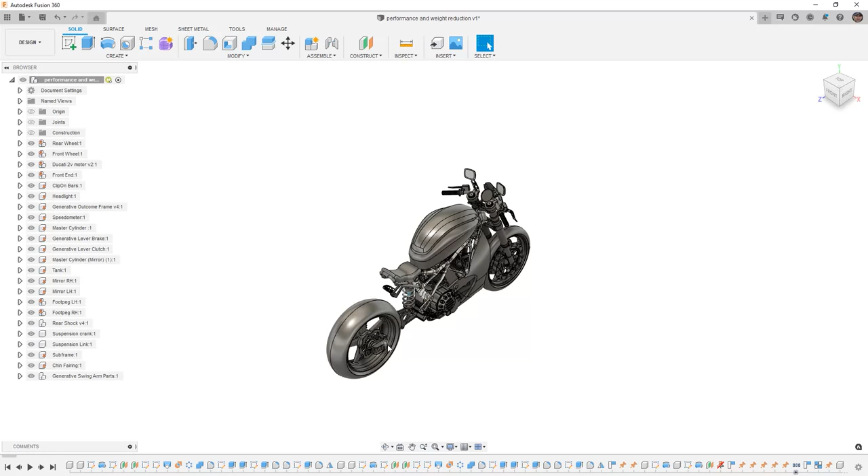If we take a look at this design, you'll notice that pretty much everything except for the frame is still in the default steel gray material. So the first step is for us to go to Inspect and turn on Component Color Cycling. This will make it easier to identify the different components in the design. Oftentimes when you have an assembly with a large number of components, you'll get situations where there are very similar colors on components close to each other. If this is the case, we can always take a look at changing those colors.

First we're going to go to our rear wheel, right click, and cycle the component color. As we do this, it will simply go through the list of colors available until it gets to the next available color. We can drill down further - for example, if we want to focus on just the tire, we can cycle the component color until we're happy with it, and that way we can quickly and easily differentiate between different components in a design.

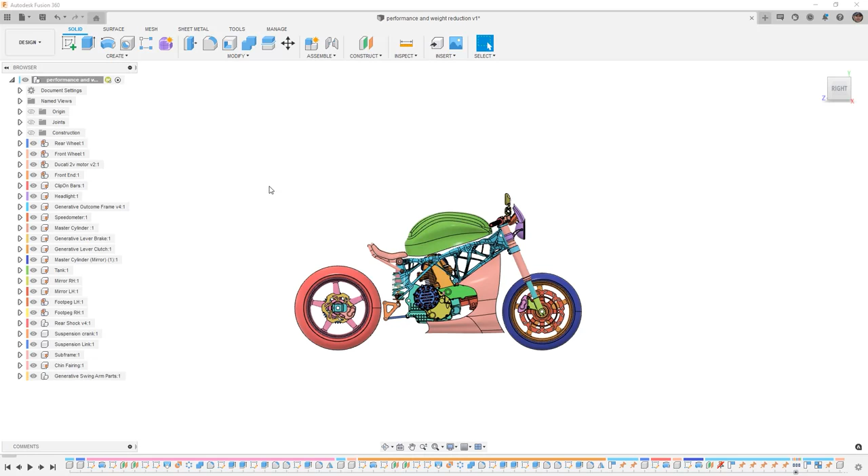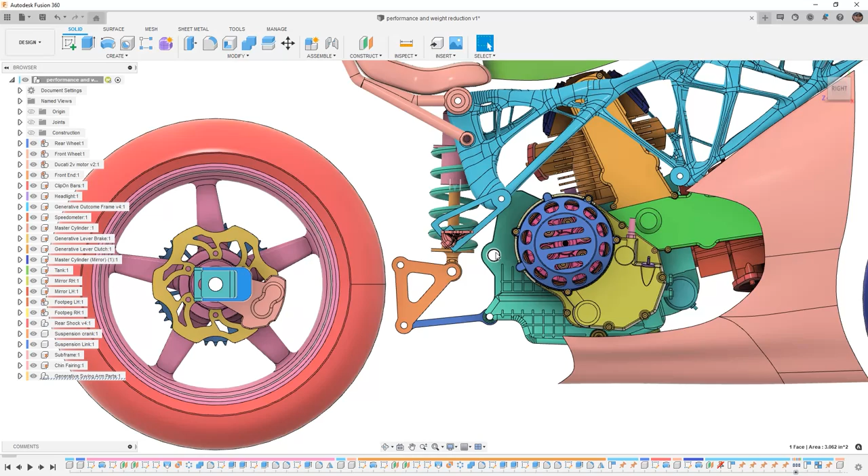There's obviously a lot in this design, and we're going to have to make sure we understand the components that are needed and the areas in which we have to build. We're going to have to avoid things like the coil spring and portions of the linkage while creating obstacles and preserves. We also need to maintain the axle blocks and move around the rear brake as well as the tire and rim. We're going to be mounting to the engine itself at this pivot point, so it gives us a good idea of the space we have to work with.

But because of this, we also want to make sure we understand a few other key elements. First, let's identify the entire weight of the rear wheel. To do this, we can right-click on the rear wheel and take a look at its properties. When we look at the properties of the rear wheel, we'll note that the entire rear wheel subassembly has its material set as steel.

If we expand the physical properties, you can see that the mass is relatively large. This equates to roughly about 80 pounds, which is way more than we would expect.

If we expand the rear wheel and take a look at the rear rim, and right-click to check its properties, we can see that the material is still steel, and when we look at the physical properties again, it's a relatively large number. This is common when we have designs that are handed to us with all of those default materials. Obviously, when we don't have component color cycling on, we can see the gray material, which gives us a hint as to what the material is for all of our components. But in order to get accurate mass, you want to make sure you're using the correct materials.

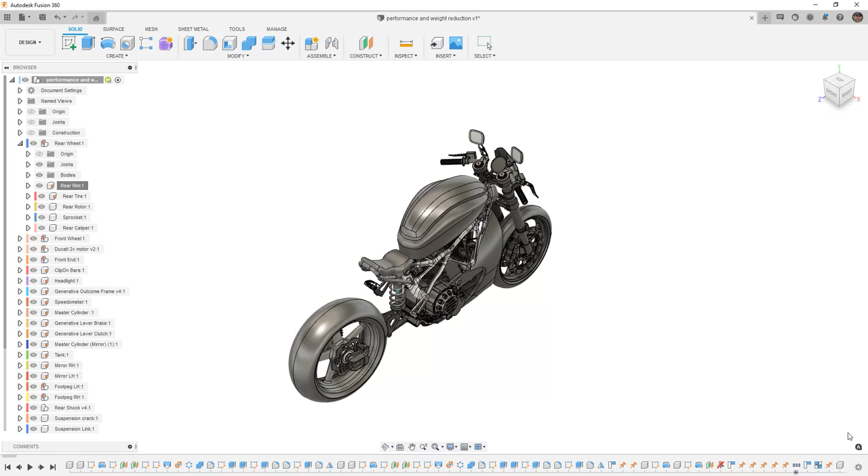For example, for the rear rim, we can right-click and change the physical material. In this case, we want to use a metal material, and we're going to go to an aluminum. I'm going to simply use the default aluminum, as the mass properties are similar across all of the aluminums inside of Fusion 360. There are some exceptions, but this will give us a better idea.

From here, if we take a look at the physical properties, we can see that we've dropped from about 788 ounces to 271. This is a drastic difference, which will make a big change in the overall mass. Ultimately, for this assembly, we're going to be looking at roughly about 50 pounds including the rim and the tire, and this is a worst-case scenario. Ideally, it would be closer to about 15 to 25 pounds. But it's good to understand the components you're dealing with and their masses, as it might come up when we're setting up our generative design study.

At this point, it's a good idea for you to continue to investigate this assembly. Make sure you understand and identify several of the components that we're going to have to be working around before we get into our generative study setup. If you make any changes, make sure that you save the design before moving on.